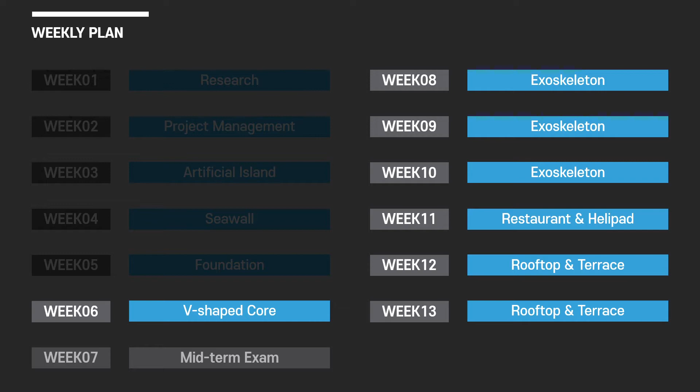From this week, we'll start our study about Burj Al Arab's main building, starting from the V-shaped core, then exoskeleton, restaurant, helipad, rooftop, and lastly, terrace. Let's begin our sixth presentation.

The presentation will proceed starting from a brief review about the artificial island, then moving on to this week's episode about the shape of the core, its solution and construction. We'll end our presentation with a short preview about next week's story.

For a total of 3 weeks, we've looked upon Burj Al Arab's artificial island. We started with 3 problems behind it. First, a clash between architecture and engineering on whether the artificial island should be built or not. Secondly, the enormous capital problem for construction.

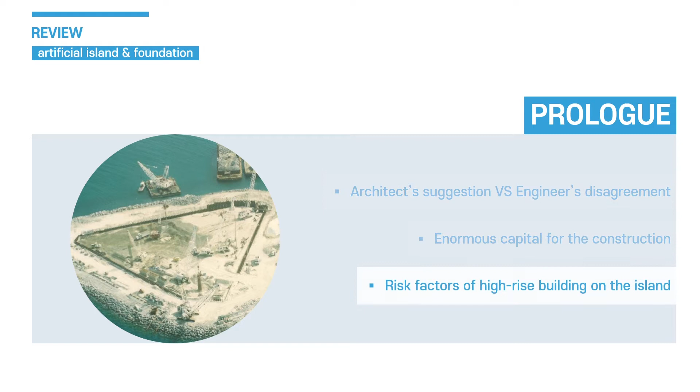Lastly, the risk factor of building a high-rise building on the artificially built island. The first and second problems were easily solved by the client's power. The client strongly wanted to build the buildings on the artificial island. The client was also the prime minister of the country, therefore the financing problem was solved. Solving the risk factor was important.

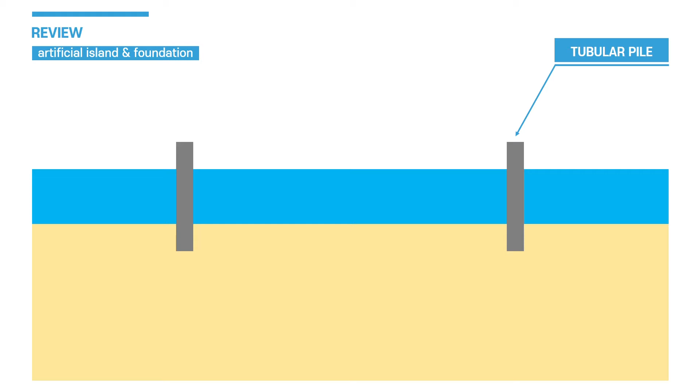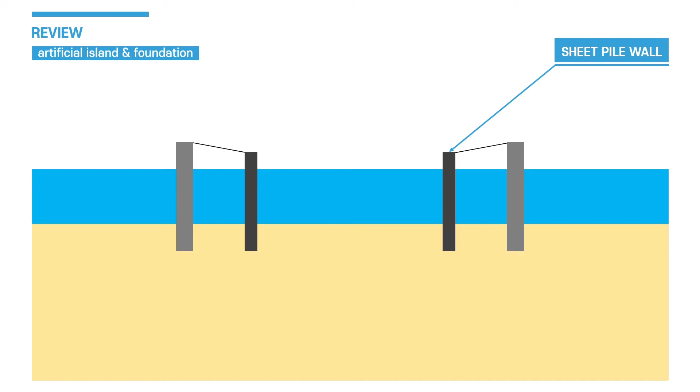The construction of the artificial island started with inserting tubular piles inside the seabed. Then, they erected sheet piles that would form the shape of an island and temporarily connected them with the tubular piles. The inside was filled with sand and rock armors were arranged around for stability.

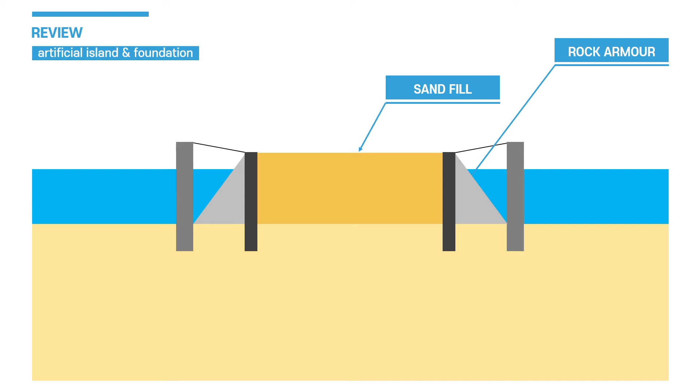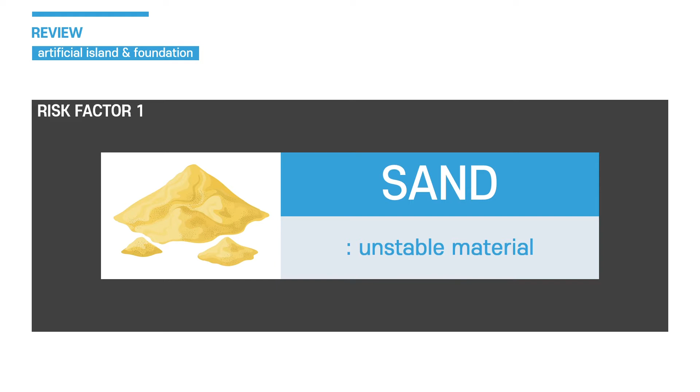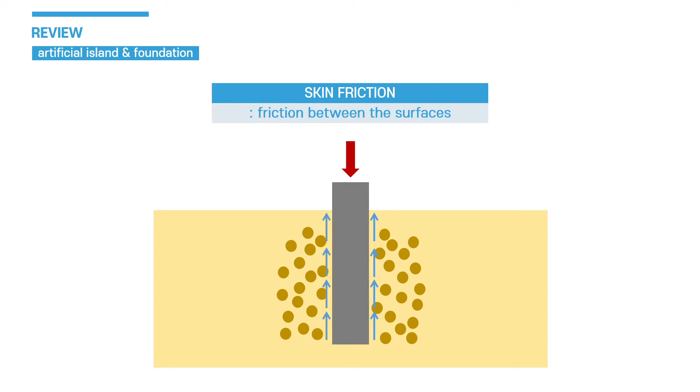Now, risk factors arise after finishing the construction up until here. First was the sand. They had to build a 321 meter tall building on an unstable material. They solved this problem with skin friction, which is the friction between the surfaces. The piles inserted stayed stable and rigid because of this friction.

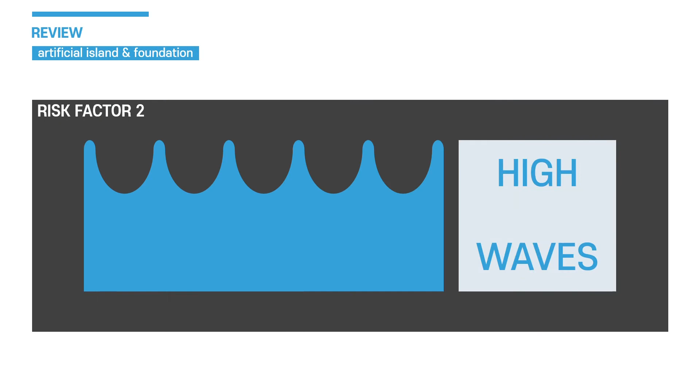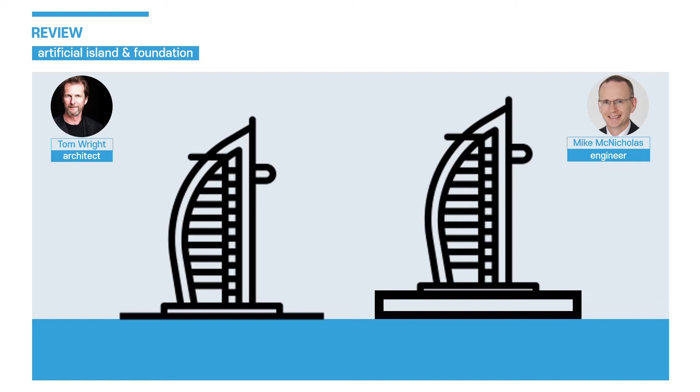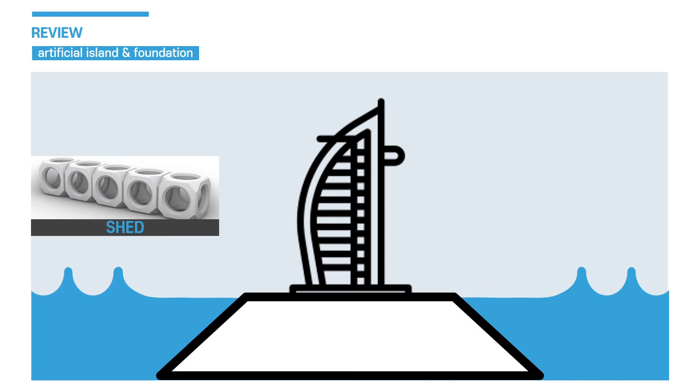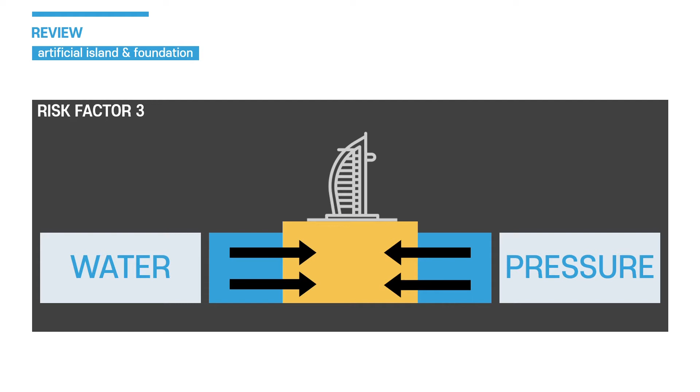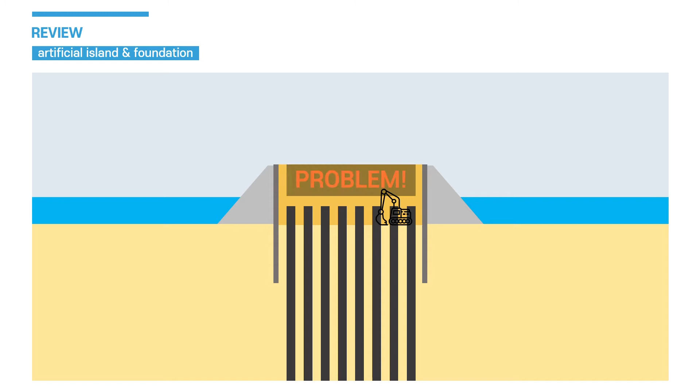Third and last risk factor was the water pressure. They needed to excavate the sand for the basement. However, there was a problem: because of the water pressure difference, blindly excavating could result in a boiling effect or sand boil.

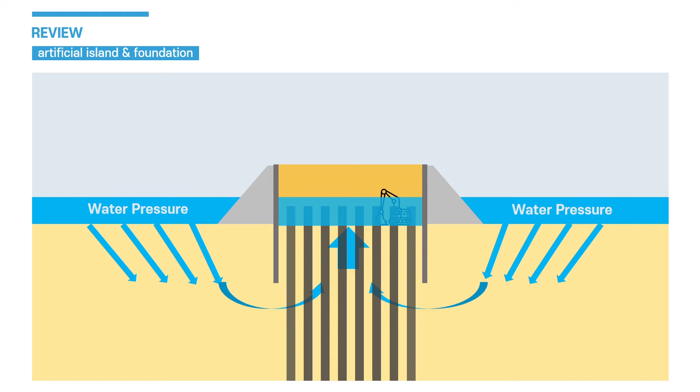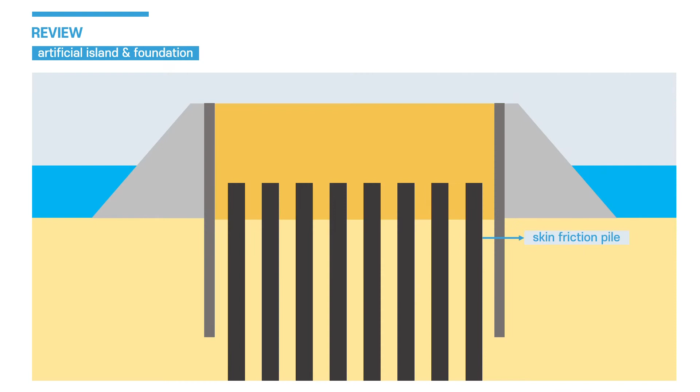This was solved by the jet grouting method and bottom grouting with a temporary sheathing method, which was done by constructing a slab with a cement seal that could endure water pressure. This effectively prevented water from flowing to the foundation.

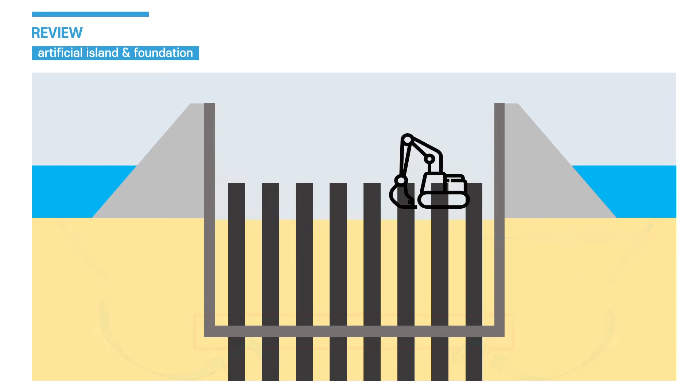After that, excavation was possible. With all the sand excavated, they created the concrete slab for the basement, and removing the exposed concrete piles, the artificial island was finally done. This is how the Burj Al Arab successfully built the one and only artificial island despite those various risk factors.

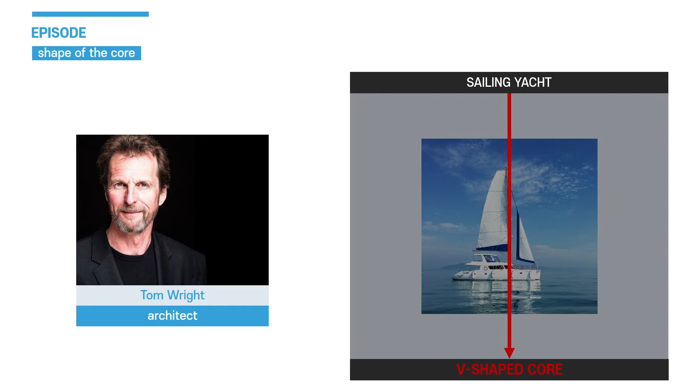Now, from this week, we will talk about the main building. To effectively describe the shape of a yacht, the core of the Burj Al Arab was decided in a V shape. Burj Al Arab's two unique aspects were created because of this V-shaped core.

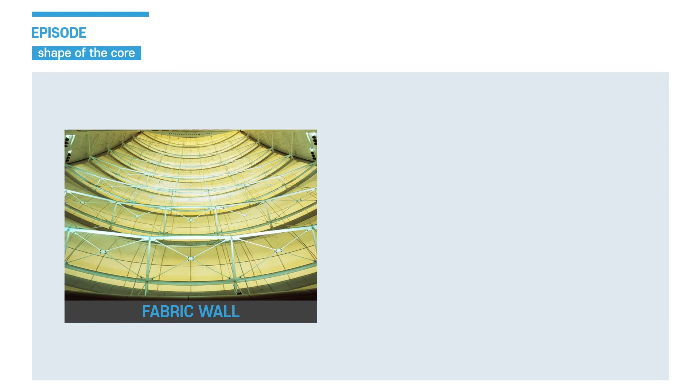The first one is the fabric wall. The front of the building, fully exposed because of the V-shaped core's two wings, was covered with the fabric wall, which also resembled a real sail of the yacht. Also, the center space created between the wings and the fabric wall worked as an enormous atrium up to 180 meters. This atrium is where the guests of the hotel first encounter the interior of Burj Al Arab. Therefore, the client put careful effort into the design.

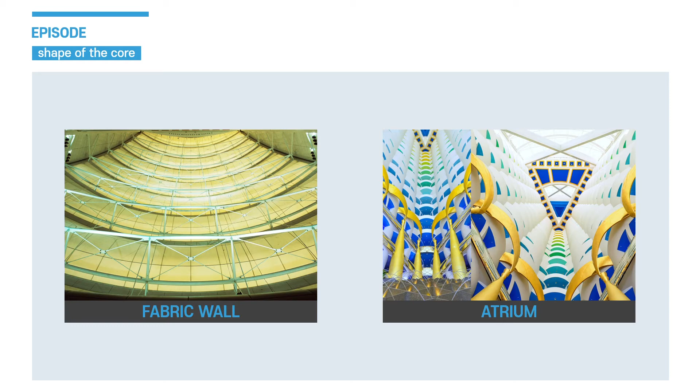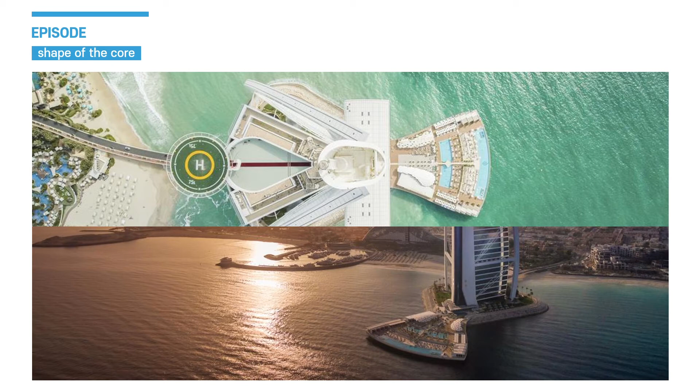This V-shaped core granted various characteristics to the building, making Burj Al Arab more special. But there was still a problem: it was about the direction of the building.

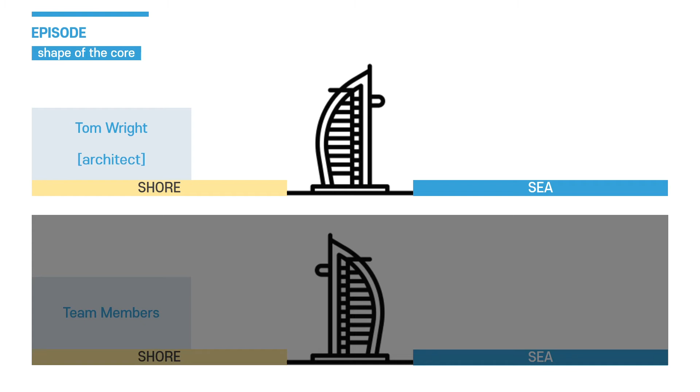Tom Wright wanted the building's front to face the land, while other team members wanted it to face the sea. This problem was solved easily because the client wanted the front to face the land. Also, because of the wind load, it had to face the land.

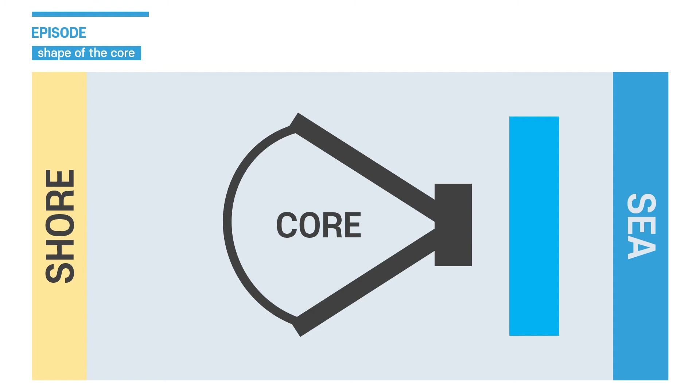Dubai, located in a sweltering place, has a strong wind. Therefore, they had to consider the wind load problem, which is also a classic problem for skyscrapers. If the building's front faces the sea, a large area is exposed to strong wind, endangering the building's stability.

As a result, Tom Wright wanted the building to face the shore, with the sharp part of the V facing the sea. But this couldn't perfectly handle the wind problem. So how did they solve the wind problem more specifically?

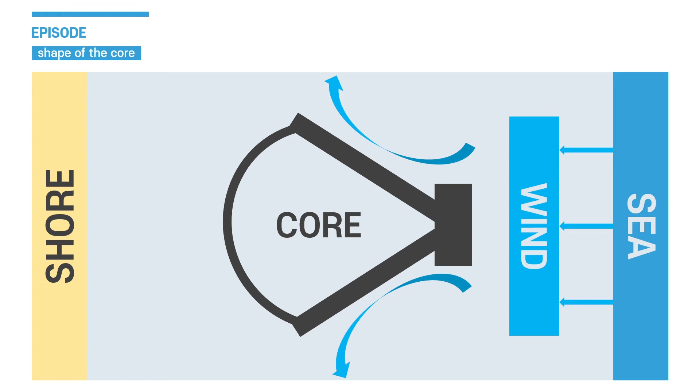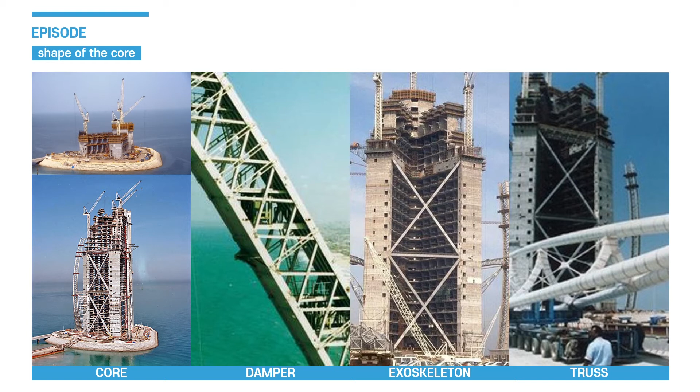Starting from this week, we will look at Burj Al Arab's core shape, the construction method, and other structures and techniques used to resist the wind. This week, we'll investigate Burj Al Arab's core.

For a total of 6 years of construction, Burj Al Arab spent almost half the time constructing an artificial island. With a limited time of 3 years, they needed to finish the main building. Therefore, they needed a method to reduce the construction period.

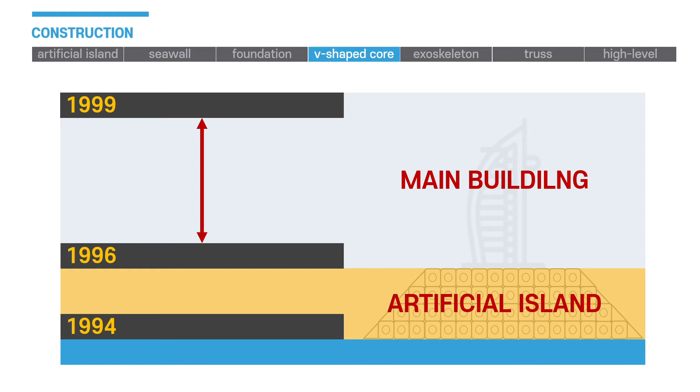The method they chose was the Core Structure Advanced Construction Method, or CSACM for short. This method starts with constructing concrete at the core first, then moving on to other parts.

As the core takes up most of the area of the building, constructing the core first could lead the whole process and secure the building to be built vertically straight. Also, as the core part and wing part of the V-shape were separated in construction, the workers could work with their steel, concrete, and other materials fluently without distraction.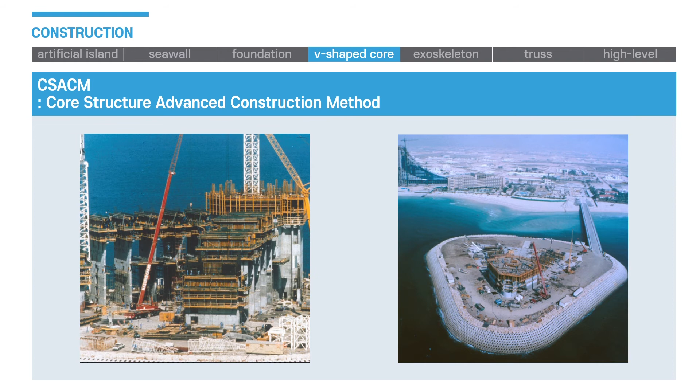They needed a way to process CSACM quickly and safely, so they chose the Automatic Climbing System, or ACS for short. ACS is a system where they use a hydraulic unit and rail to form level by level. It's also known as jumping formwork.

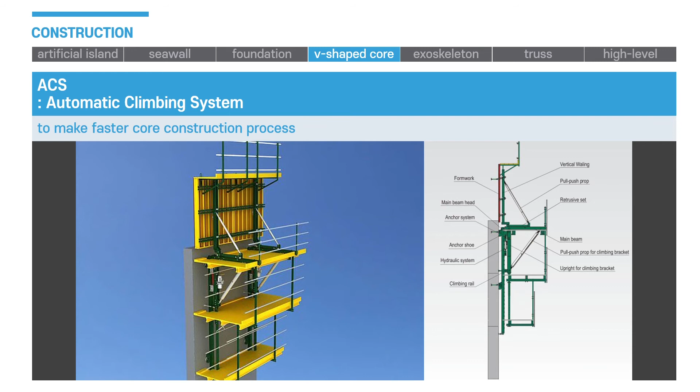It works firstly by attaching the anchor system to the ACS form. They place concrete at the height of the first floor to make a wall and attach an anchor shoe to the wall. The anchor shoe works as a support when the ACS form goes upward.

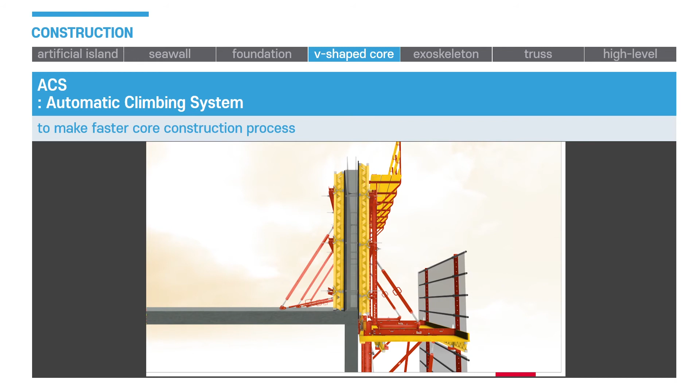The ACS form is connected across a total of 3 levels. Each level is completed by forming concrete with molds from both the ACS form at the exterior wall and the other side. When the concrete is formed, they extend steel to the upper level and prepare to form another level.

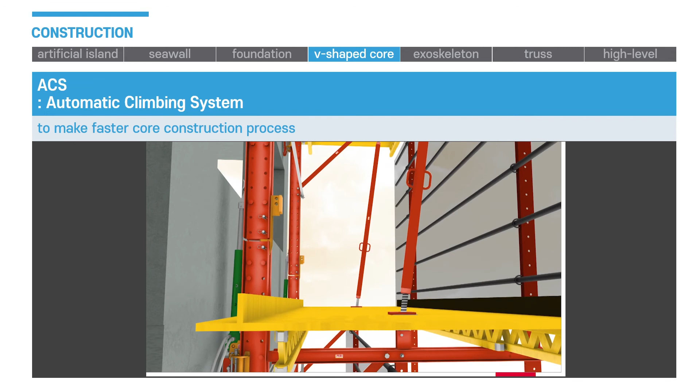The anchor shoe is attached to the completed wall, and using the hydraulic system and climbing rail, the ACS form moves to the next level. They continue the same process again and again. It usually takes an average of 3 days to complete one level.

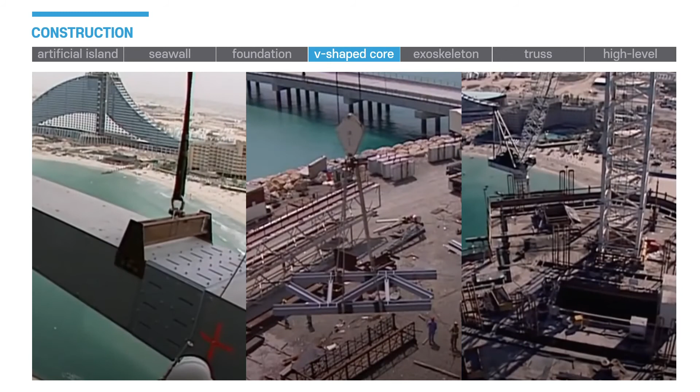Usually, ACS does not need tower cranes to process the system. However, Burj Al Arab used 3 cranes in total. Why did they need so many cranes? It was because of its unique structure.

The first unique structure was the exoskeleton, which we will study next week. The hotel is covered with various steel structures. These steel structures weigh up to 60 tons each. To move and erect them at the right place, they needed cranes.

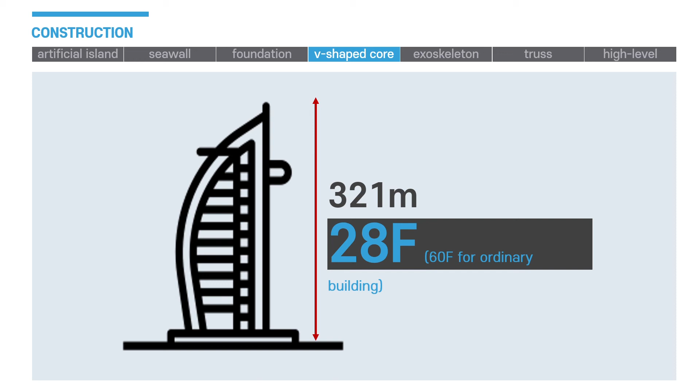Also, Burj Al Arab is known to have only 28 floors despite its height being 321 meters. It's because every room has a mezzanine, making the floor height of one level up to 7 meters. Cranes played a crucial part in creating this double-layer room.

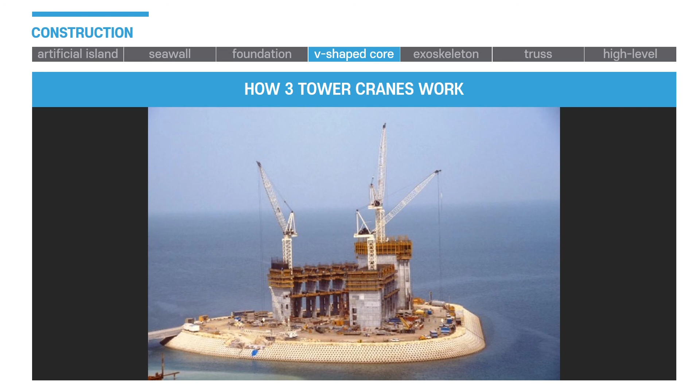3 cranes consist of one main crane, located at the core part, and 2 sub-cranes at the wing part. When building a low building, cranes are situated at the outer part of the building, but for a high-rise building, the cranes should be located above the building. How did they install the cranes, and how do they work?

The D tower section with a hydraulic system is installed at the foundation. Above it, the IC tower section is installed, then the B tower section. Then the IC tower section is installed again.

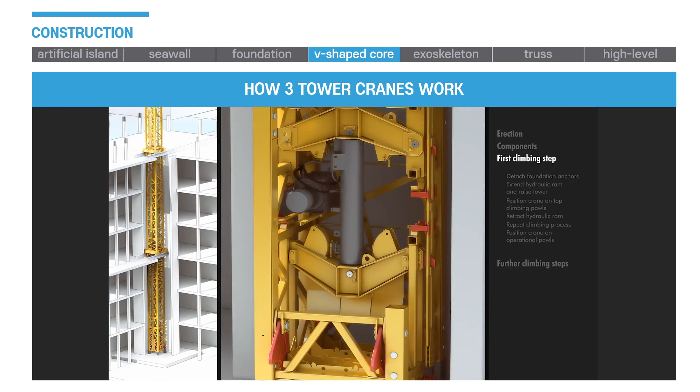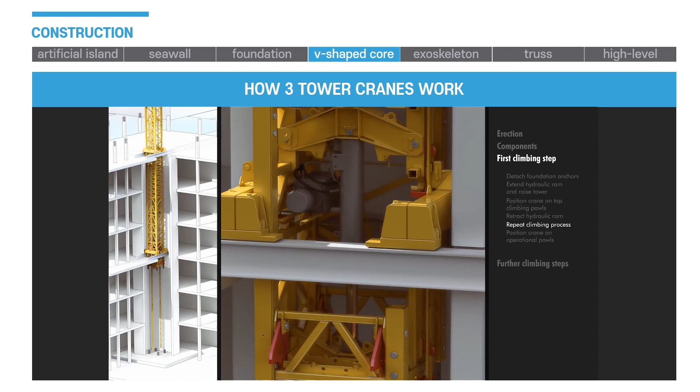When the building is constructed up to the crane's highest point, they fix the ladder placed at the left and right parts down to the lower tower section. Then, using the hydraulic system, the crane is moved upward. They continue this process along with the height of the building.

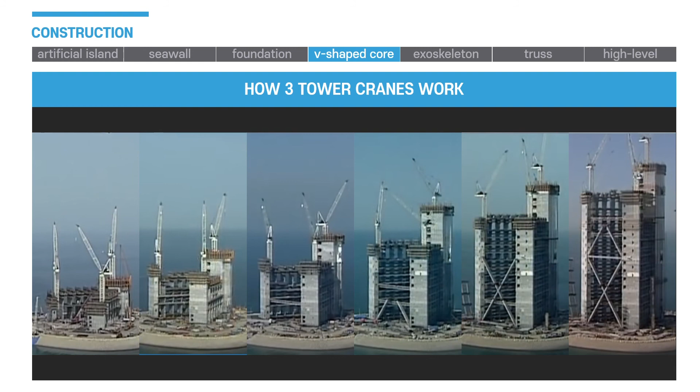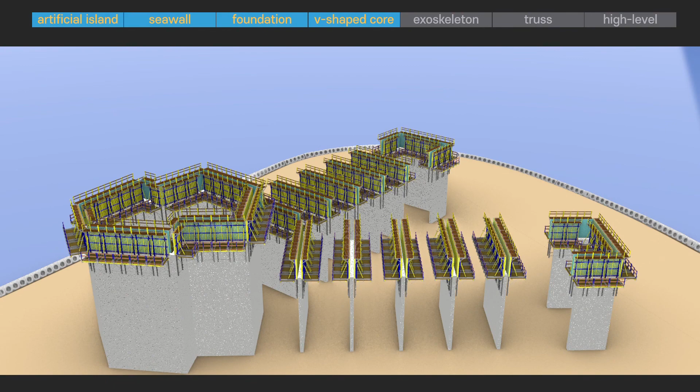Since they used CSACM, the core was constructed in advance. Therefore, the main crane was placed a little higher than the outer wing's sub-cranes. Starting from the foundation we completed last week, using the auto-climbing system, the core is built in advance, with the 2 wings following. ACS creates one level in approximately 3 days.

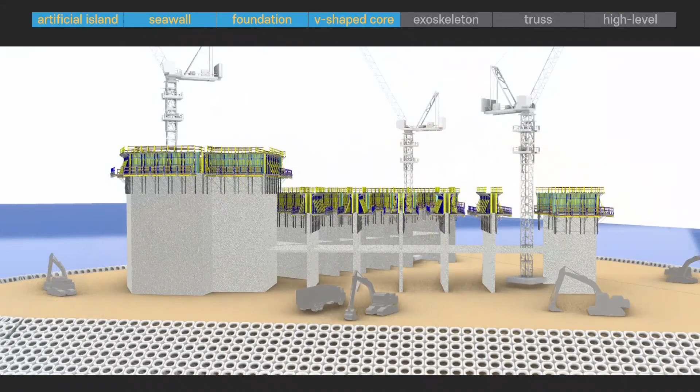The 2 sub-cranes at the wing part are used to install the mezzanine slab of each room. The slab for the mezzanine was formed uniformly by prefabrication. When the 7 meters high floor was completed, the slab is installed. This is how Burj Al Arab constructed the main core and double-layer room.

However, the problem with wind load was not over. Next time, we'll study what structures were applied to make the building more stable against wind load. Thank you for listening.